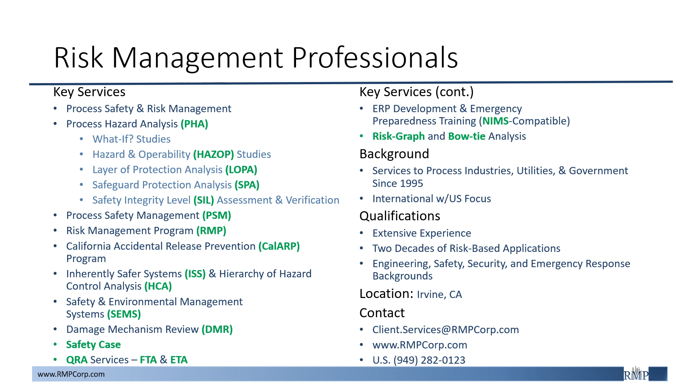Offsite Consequence Analysis, or OCA for short, assesses the distance a chemical release will travel before personal exposure to hazards is no longer likely.

There are two types of chemical releases. One is toxic substance, which will lead to personal exposure to toxics, and there is flammable substance release, which will lead to personal exposure to fire.

Offsite consequence analysis, also known as hazard assessment under CalArp, RMP, and PSM, is required no matter which program level your process belongs.

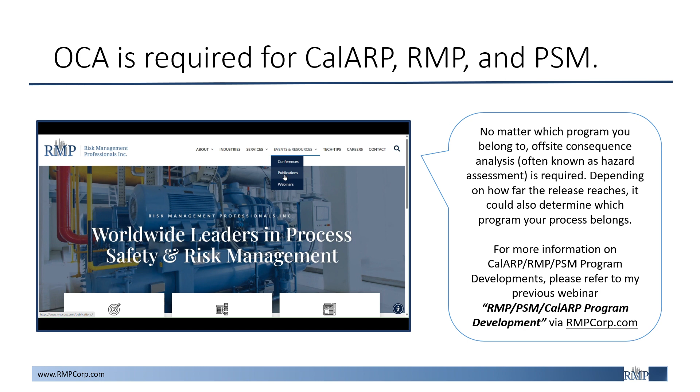For more information on what CalArp, RMP, and PSM are, the differences between the three, and what each program entails, please refer to my previous webinar titled RMP, PSM, CalArp Program Development via rmpcorp.com.

With that being said, we will now go over the two types of offsite consequence analysis. One is worst case scenario, and the other is alternative release scenario.

The worst case release scenario is usually the loss of the total contents of your largest vessel or process line, although some exceptions may apply, such as the dispersion of toxic gas.

What determines a release being the worst case is that the impact could travel the furthest and can affect the greatest number of public receptors or population.

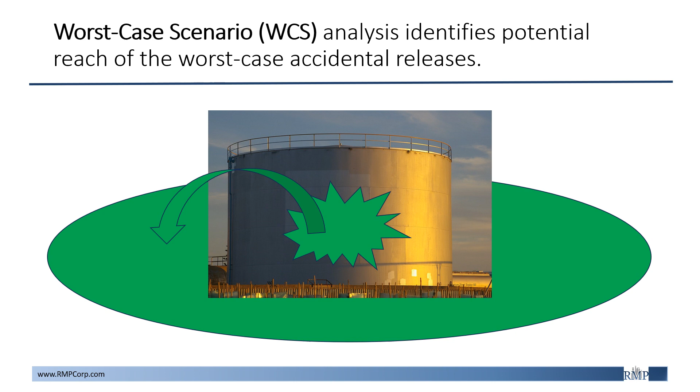On the contrary, alternative release scenarios are more likely to occur than worst case scenario. In some cases, this may be a flange leak or a piping leak.

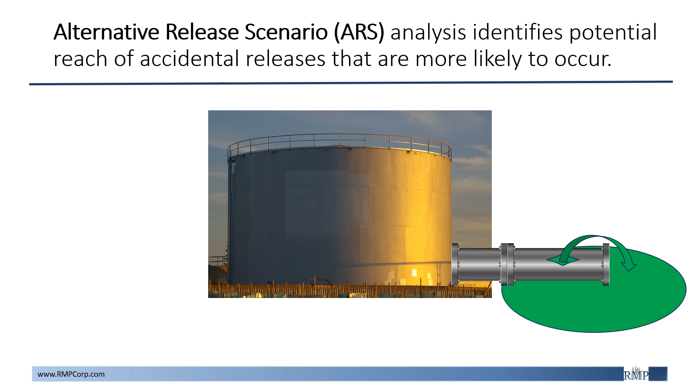Per EPA's guidelines, alternative release scenarios considered should include but are not limited to the following where applicable, such as transfer hose release due to splits or sudden hose uncoupling, process piping releases from failures at flanges, joints, welds, valves and valve seals, and drains or bleeds.

Process vessel or pump releases due to cracks, seal failure, or drain, bleed, or plug failure, vessel overfilling and spill, or overpressurization and venting through relief valves or rupture disks.

And lastly, shipping container mishandling and breakage or puncturing leading to a spill. And all these examples will be dependent on the facility and its operation.

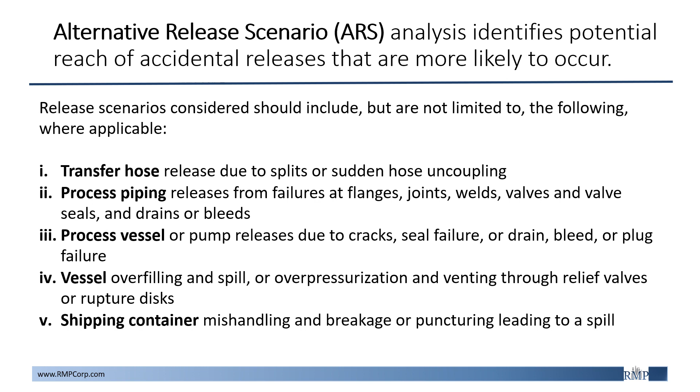So not only is the offsite consequence analysis or hazard assessment required under the EPA, RMP, and CalArp, it also helps us determine which program level our facility belongs. The differences in program levels mean differences in the requirements needed to be fulfilled.

Some of the critical factors which determine a facility's program level include, first, proximity to public receptors upon a worst-case release scenario, which is determined through dispersion modeling.

Second is the occurrence of off-site impacts with a regulated substance, this is whether there have been accidental releases previously or are accidental release records. Thirdly is whether the process is subject to OSHA PSM standards and NAICS codes.

This is determined by the substance used in our processes. Now, a key point to remember is that any process can be eligible for Program 1 even if it is subject to OSHA PSM or is in one of the NAICS codes.

For more information, please refer to the General RMP Guidance document, Chapter 2, Applicability of Program Levels, which is also where this exhibit is sourced.

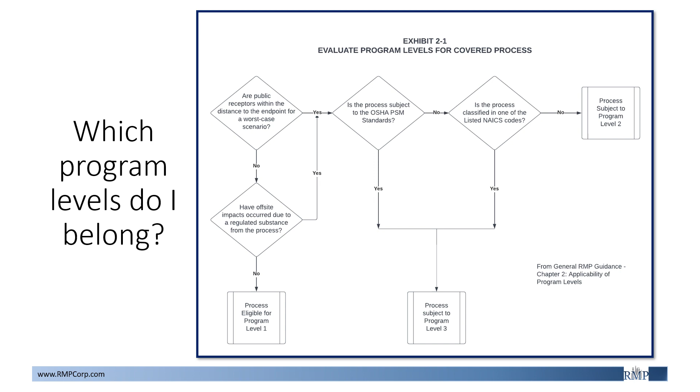As you may have noticed, we have been using the term covered process when discussing program levels. The word process, as defined under 40 CFR section 68.3, is any activity involving a regulated substance, including any use, storage, manufacturing, handling, or on-site movement of such substances, or a combination of these activities.

And the word covered process is basically that, but the process contains a regulated substance that exceeds the threshold quantity that is either established by OSHA, EPA, or CARB, depending on which one you exceed or where you are.

Now, in terms of storage tanks, processes that are stored in these vessels can be defined and separated by the following: one is that they are not tied via a connection, such as a hard pipe, and that they are stored and located sufficiently apart from each other.

For more information on how processes are defined and divided, please refer to Chapter 1 of the General RMP Guidance. I believe Chapter 1 is General Applicability, and it has an Exhibit 1-2 that contains more information or detail on how your processes can be divided or separated.

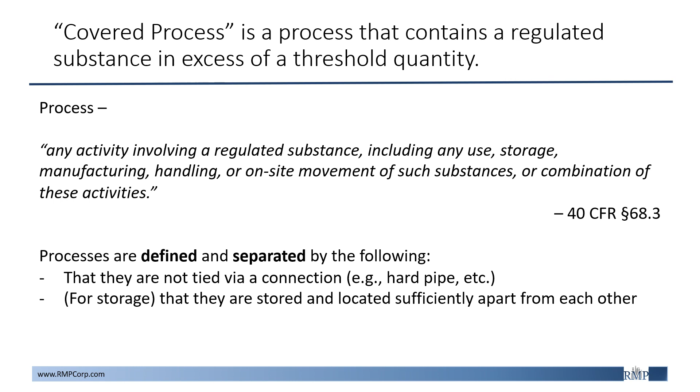So now that we've defined our covered processes as well as determined our program level, we can do the following items listed here to stay in compliance depending on your program level.

Firstly, you must do one worst case release scenario for each program 1 process. Next, you must do one worst case release scenario to represent all the regulated toxic substances in your program 2 and 3 processes. Likewise, you must conduct one worst case release scenario to represent all the regulated flammable substances in the program 2 and 3 processes.

Now, you must do one alternative case release scenario for each of the regulated toxic substances in your program 2 and 3 processes. What this means is that if you have 3 different regulated toxic substances, you must do 3 different alternative case releases for each of the toxic substances you have at your facility.

But differently, you must only do one alternative case release scenario that represents all the regulated flammable substances in your program 2 and 3 processes. What this means is that if you have 3 different flammable substances, you only need to report one alternative case release that will cover all 3 flammable substances.

And what this basically means is choose the flammable substance that has the furthest distance to the endpoint upon a worst case release or upon an alternative case release, and use that to represent all of your flammable substances.

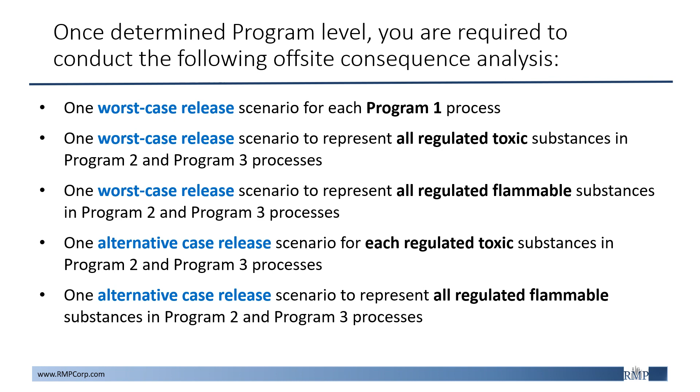So, starting here, we have a storage tank that contains a regulated substance that exceeds the threshold established by either OSHA PSM, EPA RMP, or CalARP.

And then we conduct a worst case release scenario for our storage tank here, which is usually the rupture and release of the entire capacity of the storage tank. With that, we draw out the area of impact from our worst case release scenario, and we want to see if we are eligible for program level 1.

Just as we thought that we could be eligible for program level 1, we realized that within our area of impact for the worst case scenario, there is a school. Because of that, our process is not eligible for program level 1 because our worst case scenario reaches a public receptor such as a school.

Public receptors can include, but are not limited to, the following: off-site residences, institutions such as schools we just mentioned, hospitals, industrial, commercial, office buildings, parks, and recreational areas. Please note that public roads and bridges are not included as public receptors.

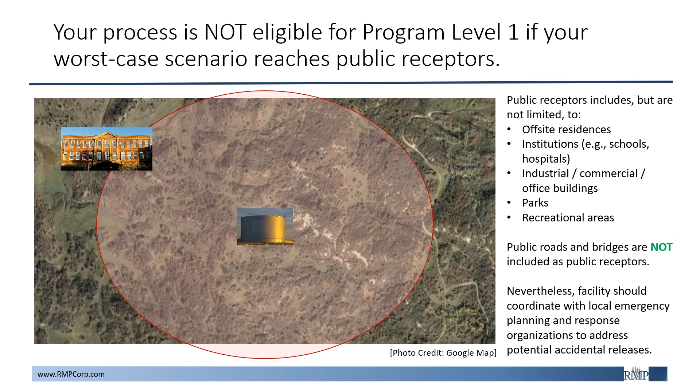Now that we did an example, let's take a quick look at what kind of facilities have higher eligibility for program level 1, and what kind of facilities are likely not eligible. If your facility has the following, you may likely be eligible for program level 1. One is if your process is not close to any public receptors. So if you're in the middle of the wilderness with very little public receptors around, you may be eligible for program level 1.

Another is if you store toxic gases in enclosed areas, which would help prevent it from going far enough to reach a public receptor. Or if you work with toxic liquids that are stored in diked areas, or upon release would be released in a diked area. Some of these toxic gases and liquids are listed here in the slides. I won't go through every single one, but typically your eligibility for program level 1 will be highly dependent on what kind of chemical you're working with and how your storage setup is established. So if you have diked areas for your tanks, or if your tanks are stored in enclosed buildings, that can greatly reduce the likelihood for your worst case scenario to reach an offsite public receptor.

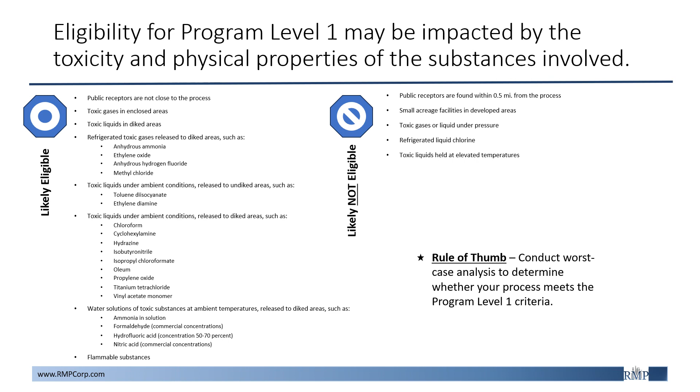Now, just a recap on program level 1 eligibility. So if your process is currently categorized as a program level 1, or you believe your process may belong to program level 1, it must fulfill the following criteria.

One is that there are no public receptors within the distance to the endpoint from a worst case release. This is, like we said earlier, with a worst case release scenario, doesn't hit any public receptors, no school, no parks, nothing that will fall within that area of impact.

Second is that there are no accidents with specific offsite consequence within the last 5 years since the RMP submittal. So within the last 5 years prior to your RMP submission, there were no release of regulated substance that led to an offsite death or environmental impact. If that's the case, then you're good for point 2.

And lastly, you must fulfill this last criteria, which is that you have coordinated your emergency response activities with the local responders. Just to note that this requirement not only applies to program level 1, but it also applies to any covered processes regardless of program level. But just to note that even in program level 1, you must make sure you have coordinated emergency response with local responders.

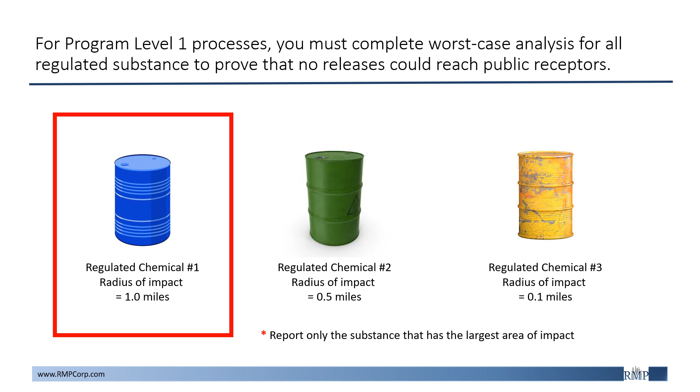Now that I think we've pretty much exhausted everything we have to talk about for program level 1, let's go ahead and jump into program level 2 or 3 processes with an example.

So let's say you are a facility that works with the following regulated substances: 3 toxic chemicals with different radius of impact for the worst case consequence, as well as 3 different flammable chemicals with different radius of impact for worst case consequence. With these 6 regulated substances in place in the facility, how many worst case analyses and how many alternative release analyses would we need to do for this facility?

Take some time to guess, come up with an answer, and I will reveal the results momentarily. All right, hopefully everyone got it right.

What you'll have to do for this facility, working with these chemicals, is to identify, analyze, and report the following: 1 worst case scenario for toxic chemical number 1. This is because toxic chemical number 1 has the furthest radius of impact, so we report the worst case scenario that covers all the toxic chemicals.

But separately, you must also do 1 worst case scenario for flammable chemical number 1. This is the worst case release leading to the worst impact case for all flammable chemicals in the site. So you also only need to report 1, but the one with the furthest area of impact.

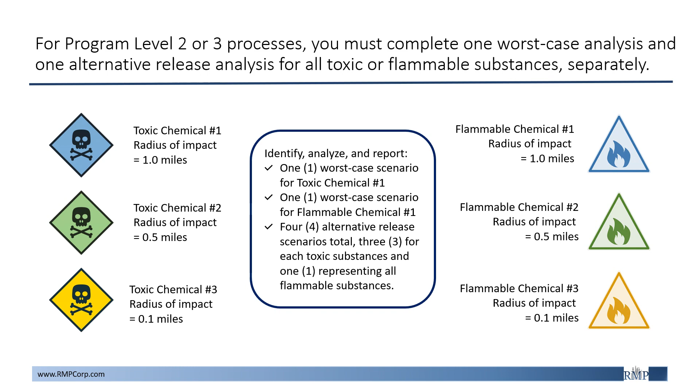Before I move on to the next part, I want to give a quick clarification on the worst case scenario for toxic and flammable substances section. There are exceptions to this requirement: if you have another chemical that affects a different public receptor than the one with the largest radius of impact, you would need to include that worst case analysis as well.

One potential example: say you have toxic chemical number 1 with a 1.0 mile radius, and the storage tank for toxic chemical number 1 is located in the center of the facility. Now let's also say the facility boundary is 0.8 miles from that center, the same location where toxic chemical number 1 is stored. And let's say we have toxic chemical number 2 stored by the border of the facility.

With that being said, toxic chemical number 1 has a 1.0 mile radius impact, which would go offsite by 0.2 miles. But you also have toxic chemical number 2 by the border, whose impact can actually reach 0.5 miles out offsite. Because of that, it could affect different public receptors compared to toxic chemical number 1. And if that is the case, you will need to report the worst case release analysis for both toxic chemical number 1 and toxic chemical number 2.

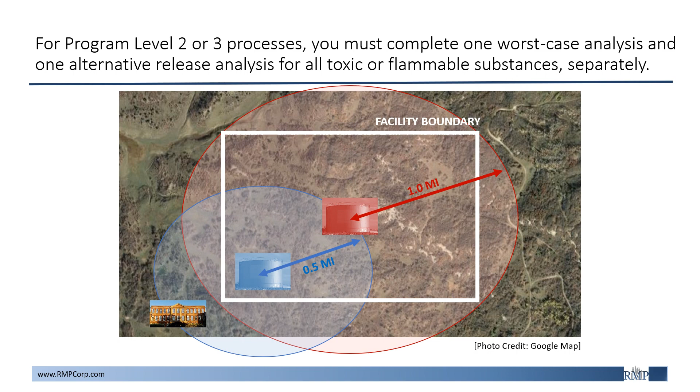So I know we've been saying toxic substance, flammable substance, but what exactly defines whether a substance is toxic or flammable is really determined by the list of substances from 40 CFR section 68.130. Within that list, it provides the basis for why a substance is listed as toxic or flammable. So the basis for listing for toxic substances are the following.

One, that it is mandated for listing by Congress, or that on the EHS list, vapor pressure is 10 millimeters of mercury or greater. Next is that it is a toxic gas. Next is the toxicity of hydrogen chloride, potential to release hydrogen chloride, and history of accidents. So there are some substances that are based on this ability to release hydrogen chloride, as well as previous records of historical accidents.

And in a similar manner, the toxicity of sulfur trioxide and sulfuric acid—any chemicals with potential to release sulfur trioxide, as well as previous history of accidents in other industries or manufacturing facilities in the past. So all of that is a basis for why a substance is listed as toxic.

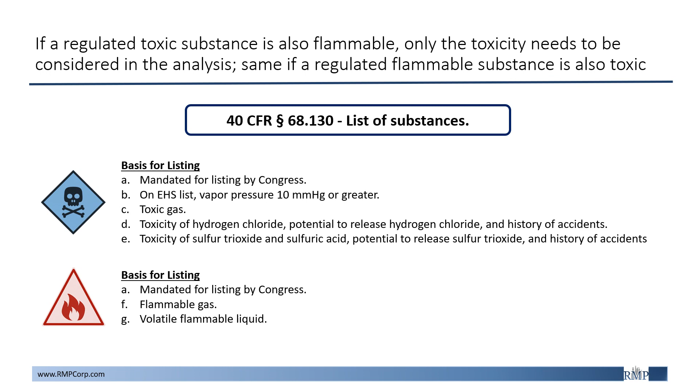I have an example here. If you refer to the Code of Federal Regulations, section 68-130, you'll see the substance. If you scroll down, you'll see the basis for listing, starting with two tables of toxic substances, then two tables of flammable substances, just listed in different orders. But referring to that table, it should be pretty clear whether a substance is toxic or flammable.

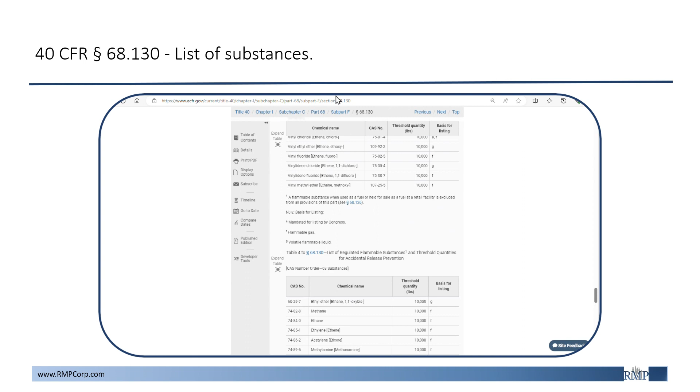So, like everything else we've done in this webinar, we'll do an example. Here we have the chemical cyanogen, which is a regulated substance. Per the hazard grading, it is a 4 in health, which can be lethal. It is a flammability 4, which burns readily, rapidly or completely vaporizes at atmospheric pressure and normal ambient temperature. And a 1 in instability, meaning it is normally stable but can become unstable at elevated temperatures and pressures. No special hazards aside from that.

So since it is both a health 4 and a flammability 4, how will we know if this is a toxic substance or a flammable substance? The answer is simple: refer back to the list of substances under 40 CFR section 68-130. Cyanogen is regulated as a flammable substance and thus should be analyzed as such.

It is a bonus, although not legally required, to consider the toxicity of the substance. As we can see from the health grade, even though it is a health 4, you are only required to treat it as a flammable gas and analyze the hazards associated with this chemical as a flammable substance.

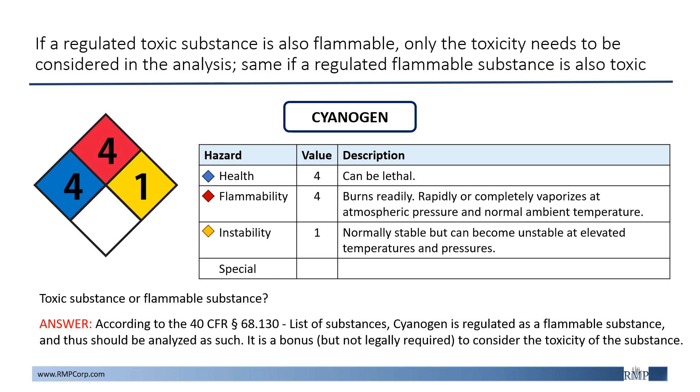Now that we've discussed everything to do with program level 1, 2, and 3, here is a table that summarizes everything we've talked about so far. If your processes are categorized as program level 1, you must do one worst case release scenario for each process, making sure that none of your covered processes or regulated substances are going to go offsite and affect a public receptor. That's for program 1.

If you're in program 2 or 3, you must do one worst case release scenario to represent all the regulated toxic substances in the process, and one worst case release scenario to represent all regulated flammable substances in the process. Then, you do one alternative release scenario for each toxic substance, and one alternative release scenario to represent all regulated flammable substances in the process.

Just a quick clarification for program 1: you do one worst case release scenario for each process to check that it doesn't go offsite and affect a public receptor, but you only need to report one, once you've determined which one has the furthest area of impact.

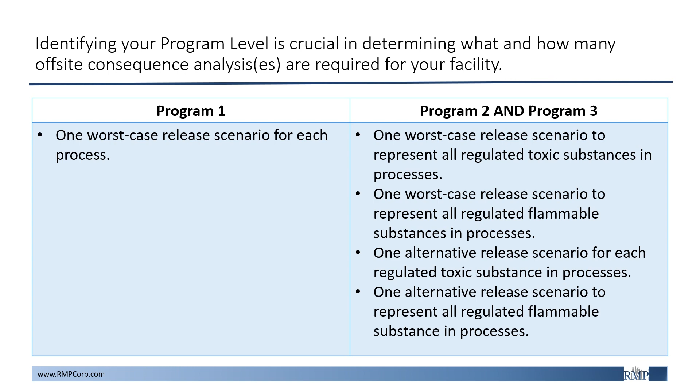Say your facility has multiple regulated chemicals and they all fall under different program levels. Maybe one of your chemicals is eligible for program 1 because it doesn't go offsite and doesn't hit any public receptors, but you have two other chemicals that do reach public receptors, so they're either program 2 or 3, depending on whether you're under OSHA PSM regulations or not. When you have different processes falling under different levels, it's actually pretty simple — you just handle each chemical or process separately.

For chemical number 1, you would need to do one worst case analysis only; you don't need to do an alternative release scenario. You also need to do one worst case analysis to cover both chemical number 2 and 3, depending on which one travels further offsite, or both if they affect different public receptors. Lastly, you would need to do two alternative release scenarios, one for chemical 2 and another for chemical 3. This is assuming we are dealing with toxic regulated chemicals only.

If it is flammable, then as we said before, it would be one alternative release scenario to cover the two flammable substances. So in terms of CalARP or Risk Management Program, hazard assessment can include all three chemicals in the report, so long as the program category is clear. You won't need to make three separate reports to cover each of the processes — one report, so long as it's clear, is adequate.

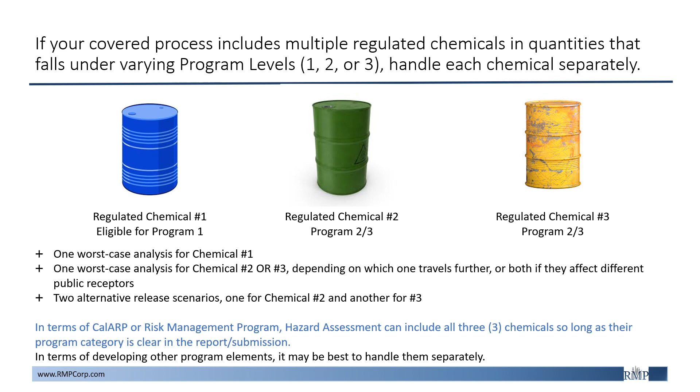And I know we've been using phrases like offsite consequence analysis, worst case release scenario, alternative release scenario, but never really touch upon how exactly are these releases analyzed. So this is Exhibit 4-1, also from the General RMP Guidance from EPA. This is considerations for choosing a modeling method. There are some approaches you can take to assess your offsite consequence.

First one is the simple guidance, per EPA's Offsite Consequence Analysis guidance. There's some advantage to this - it is free, and there's no computer requirements. Well, obviously, if you're accessing it from a laptop, then you would need a computer. But with the guidance alone, you don't need to download or purchase any dispersion modeling programs or modules.

It is simple to use. It provides all the data you need, as well as tables and distances, and it eases compliance with the rule. Some disadvantages to that, though, is that the results are oftentimes conservative and may be further than the actual realistic case. There are also very few site-specific factors considered, so you may not be able to consider diked areas or enclosed buildings and things like that.

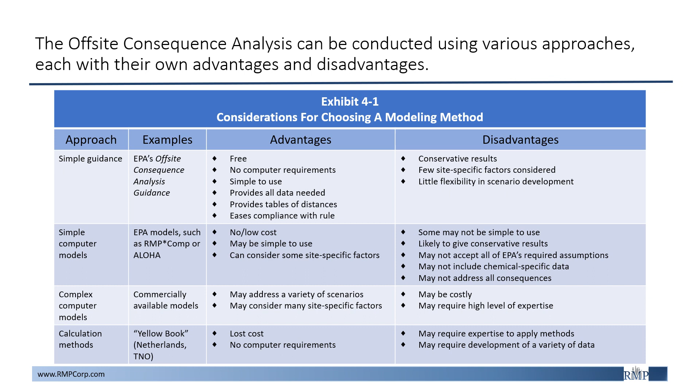Now, next is what we were talking about just before: the EPA's assumptions or parameters required for modeling the worst case offsite consequence analysis. First, starting with endpoints. For any toxic substance, use the endpoint specified in Part 68, Appendix A, list of substances. For flammable substances, use the endpoint of an overpressure of 1 psi for vapor cloud explosions.

Next is wind speed and stability. Use 1.5 meters per second and F stability class. This is defined as moderately stable conditions. If you use ALOHA, it will actually separate the stability class by letters, so you can select the F stability class when you want to model a worst case release scenario.

Next is ambient temperature or humidity. Use the highest daily maximum temperature during the past 3 years, and use average humidity for the site. You can find this information simply through Google—if you search any reliable weather engines, you should be able to get this data.

Next is the height of release. For a toxic substance, assume a ground level release. For topography, use urban or rural topography as appropriate, depending on the location of your facility. Next is dense or neutrally buoyant gases—there are tables or models used for dispersion of regulated toxic substances that must appropriately account for gas density. This only applies specifically to dense or neutrally buoyant gases, and in most cases it won't apply, but when it does, make sure your model or table accounts for that gas density.

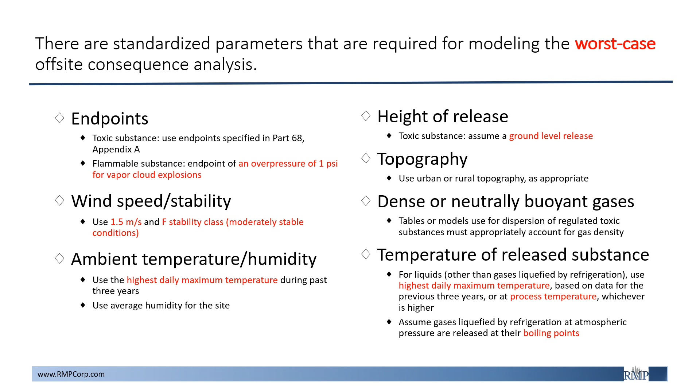Next, we have the assumptions or standardized parameters for the alternative case release scenarios. First, starting with endpoints.

For toxic substances, still use the endpoints specified in Part 68, Appendix A. But for flammable substances, use the following endpoints: overpressure of 1 psi for vapor cloud explosions, radiant heat of 5 kilowatts per meter squared or equivalent dose for fireballs or pool fires.

And lastly, the lower flammability limit, LFL, for vapor cloud fires. Next is wind speed and stability. Use the typical meteorological conditions at your site. You can find this in most weather engines.

Next is ambient temperature or humidity. For your alternative release case, use the average temperature for the site instead of the highest over the 3 years. And then same, use the average humidity for the site. Next is height of release.

In the case of an alternative release case, the height may be determined by the release scenario itself. So it will be dependent, versus worst case, where you're always assuming ground level for toxic substance. Next is topography. Same idea, urban or rural, depending on where your facility is located.

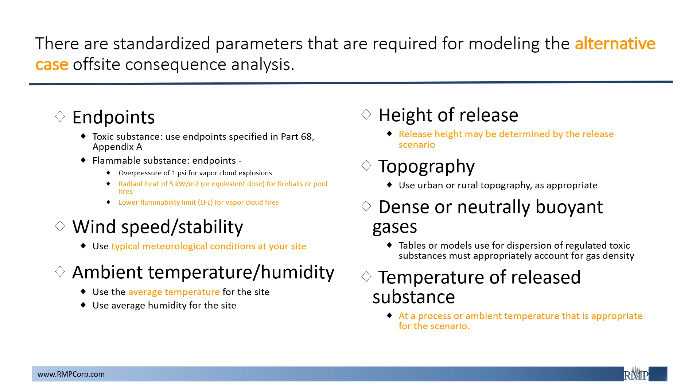We're pretty much at the end of the webinar, but before we wrap up the topic, we will go through a few Q&As to help us identify or resolve any questions that we might have. I picked a few interesting questions, and if this happens to be your question, that'd be great. If not, I hope this will at least provide some clarification on the regulatory requirements.

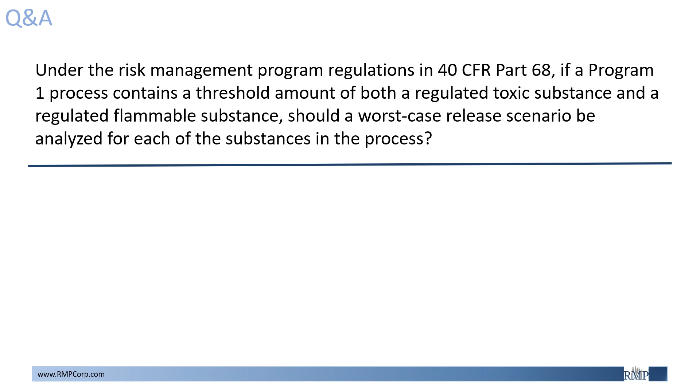So firstly, under the Risk Management Program regulations in 40 CFR Part 68, if a Program 1 process contains a threshold amount of both a regulated toxic substance and a regulated flammable substance, should a worst-case release scenario be analyzed for each of the substances in the process? Yes, a worst-case release scenario must be analyzed for each regulated toxic and flammable substance above the threshold.

This analysis will serve two purposes. First is to demonstrate that no release from that process will reach a public receptor. And second is to determine the one worst possible worst-case release scenario that results in the greatest distance to an endpoint. And that one must be reported in the RMP.

For Program Level 1, like we said earlier, you will only need to report the one worst case release scenario that has the greatest area of impact, or in other words, greatest distance to an endpoint. Meanwhile, the other one, although you've done a worst case release scenario for it to prove that it won't go offsite, you do not have to report that one. You only need to report the one that has the greatest distance to an endpoint.

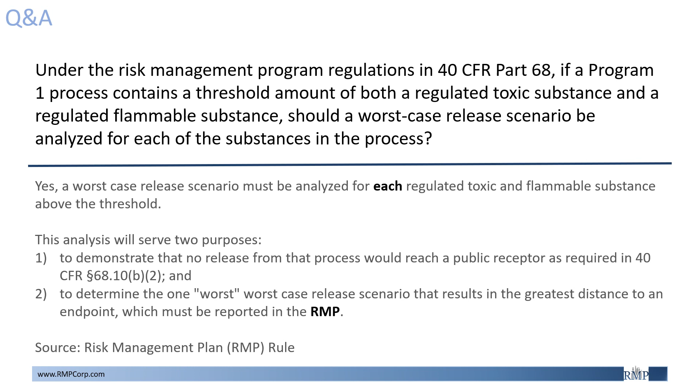Next, as a part of the hazard assessment requirements in 40 CFR Part 68, Subpart B, I must analyze worst case release scenarios and document certain analysis in my risk management plan. How many worst case release scenarios must be analyzed, and how many analyses must be specifically documented in the RMP?

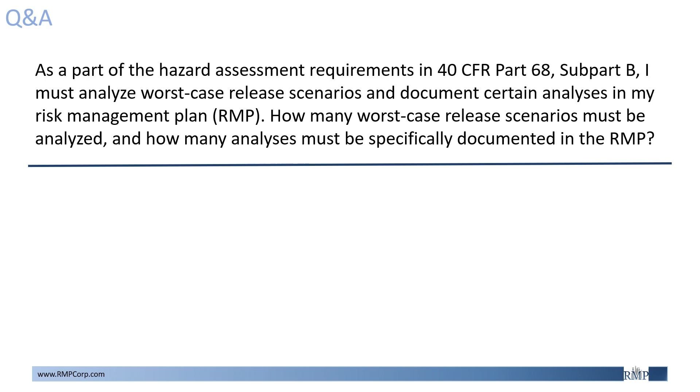So, in order to accurately determine which worst case release scenarios should be specifically documented in the RMP, the owner or operator may need to analyze the worst case release scenario, i.e., determine the scenario with the greatest distance to an endpoint for every covered process. If any particular covered process contains more than one regulated substance in excess of a threshold quantity, worst case release scenarios involving each of those substances may need to be analyzed.

Also, in order for any process to be eligible for Program 1 requirements, the owner or operator must demonstrate that the worst case release from that process will not affect any public receptor. A worst case release scenario analysis must therefore be reported in the RMP for each Program 1 process. If a Program 1 process contains more than one regulated substance in excess of the appropriate threshold quantity, the documented analysis should be for the release scenario involving the substance that would result in the greatest distance to the endpoint.

But for Program 2 and 3 processes, a single worst case release scenario analysis may be documented to represent the worst of all scenarios, i.e., the scenario resulting in the greatest distance to an endpoint, from covered processes containing regulated toxic substances. And a single worst case release scenario analysis may be documented to represent the worst of all scenarios involving regulated flammable substances.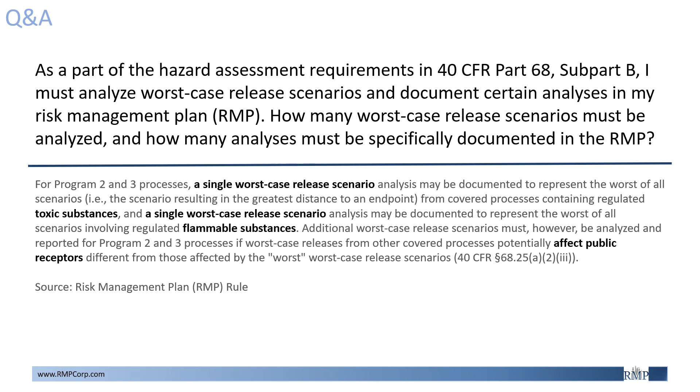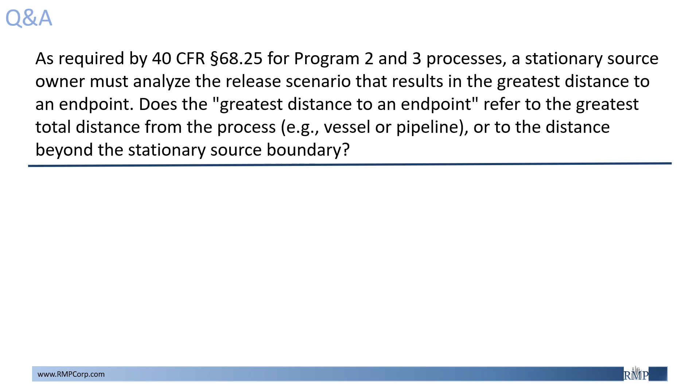The greatest distance to an endpoint will ultimately refer to the distance beyond the stationary source boundary. When selecting a worst-case release scenario, the stationary source owner or operator must first evaluate potential releases from all Program 2 and 3 covered processes.

Each release is modeled as a circle with its center at the process and with a radius equaling the distance to the endpoint concentration. The owner or operator must then choose the scenario that results in the greatest distance to an endpoint. If a scenario with a smaller overall distance to an endpoint, however, could result in a greater distance to an endpoint beyond the stationary source boundary, for example, if a process is very close to the facility boundary, it must then be chosen as the worst case release scenario.

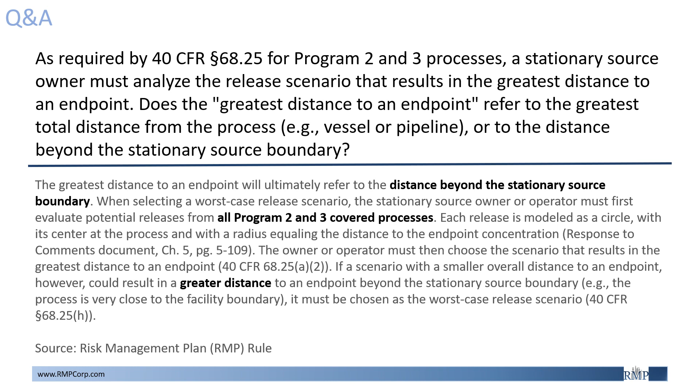Next, for the worst case and alternative release scenarios of an underground storage tank, should I consider any impact on groundwater, drinking water, or soil?

So the answer to this question is no. As part of the worst case and alternative release scenarios, you need to first define the offsite impacts to the environment by listing the environmental receptors that are within your impact zone.

Environmental receptor is defined at 40 CFR Section 68.3 as natural areas such as national or state parks, forests, or monuments, officially designated wildlife sanctuaries, preserves, refuges, or areas, and federal wilderness areas, which could be exposed to an accidental release.

You only need to list the environmental receptors and not to speculate what specific damage could occur as a result of an accidental release. Nevertheless, you should consider impacts on the groundwater, drinking water, or soil in both the accident history for Program 1 eligibility criterion and the 5-year accident history required as part of the hazard assessment.

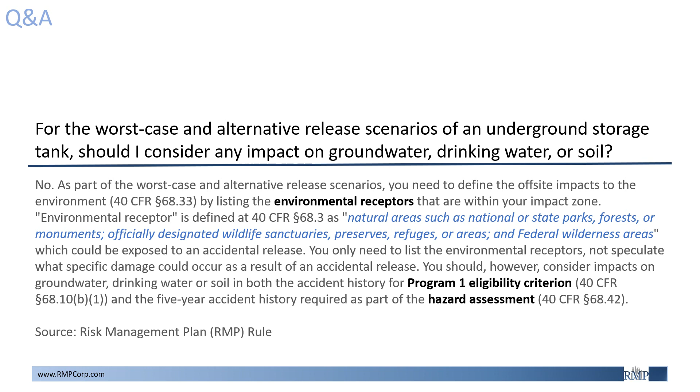So firstly, for Program 1 eligibility, you must not have had an accidental release of a regulated substance in the past 5 years that caused any response or restoration activities for an exposure of an environmental receptor.

An accidental release that led to response or restoration of soil or groundwater of an environmental receptor, such as a park, would make a process ineligible for Program 1.

For the hazard assessment 5-year accident history, environmental damage is not limited to the defined environmental receptors. Events where there is any known environmental impact of any kind, such as fish or animal kills, lawn, shrub, or crop damage, must be included in the history. Therefore, any known damage to groundwater or soil must be reported in the 5-year accident history.

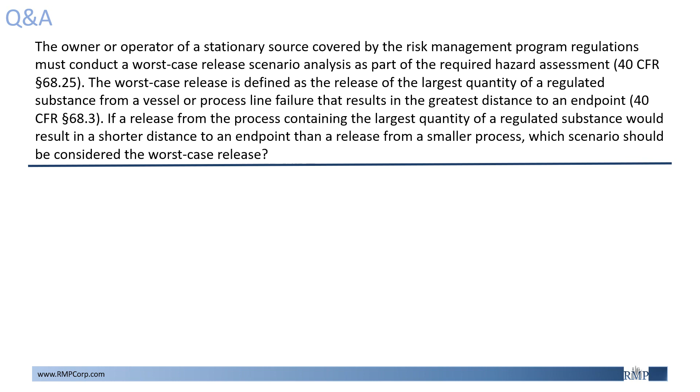So the answer to this question, firstly, the worst-case release is the scenario that results in the greatest distance to an endpoint beyond the stationary source boundary, the definition we had before. EPA recognizes that there could be release scenarios in which a smaller process could generate a greater distance to an endpoint than a release from the largest vessel or pipeline.

The regulatory language at 40 CFR Section 68.25 subsection H clarifies that a scenario involving a smaller quantity of regulated substance handled at a higher process temperature or pressure, as well as a scenario involving a smaller quantity located closer to the stationary source boundary, may in fact result in a worst-case release.